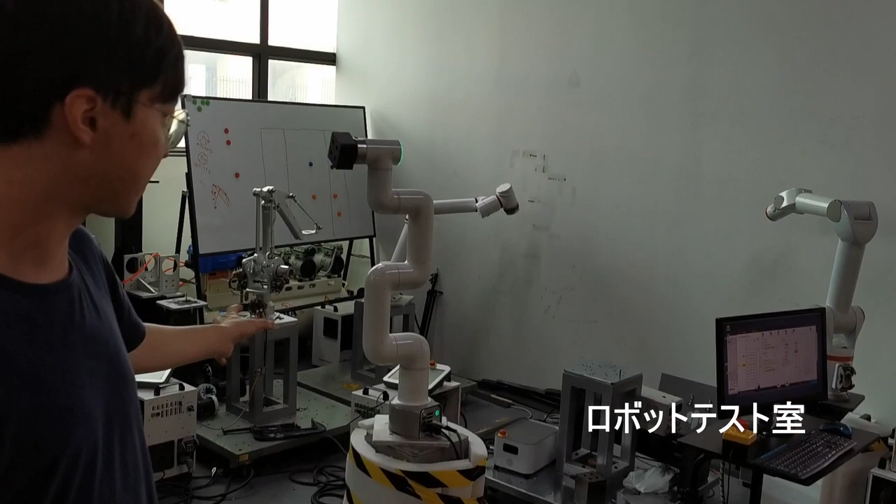This is for testing of the big robots. So we have some testing here, mainly about the testing. This one is the S series, this is the C series.

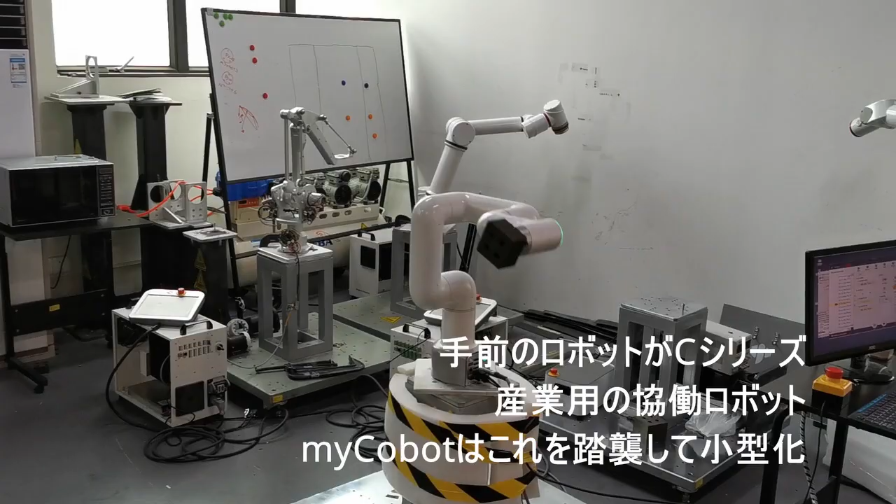So this is the initial design of the myCobot. This is the initial design. Looks very similar.

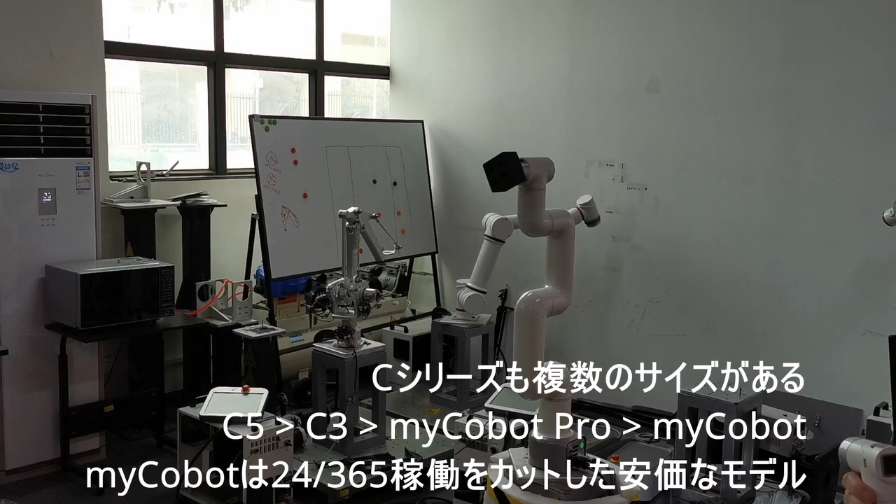The C series is the smallest industrial robot, though there may be many smaller sized robots of this kind in your product line. Yeah, so this is the C5, the payload is 5 kilograms.

We also have the C3, similar but more smaller. They are both for industrial usage. So: C5, C3, myCobot Pro, and myCobot.

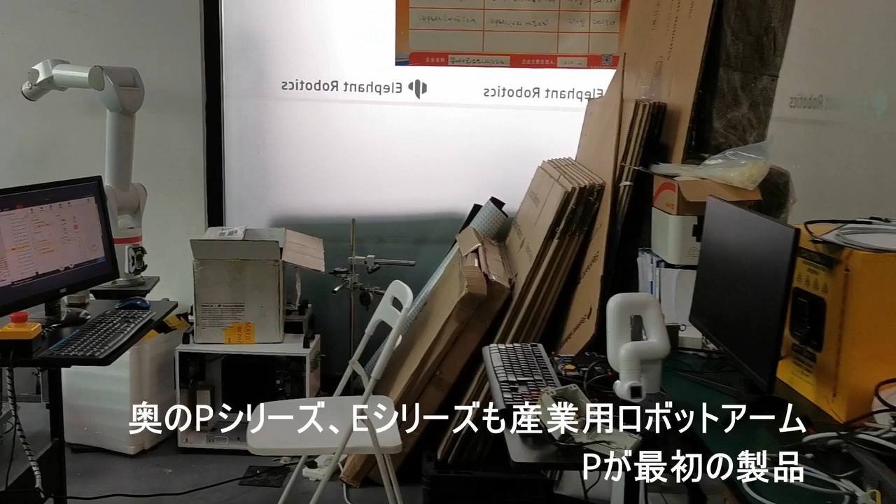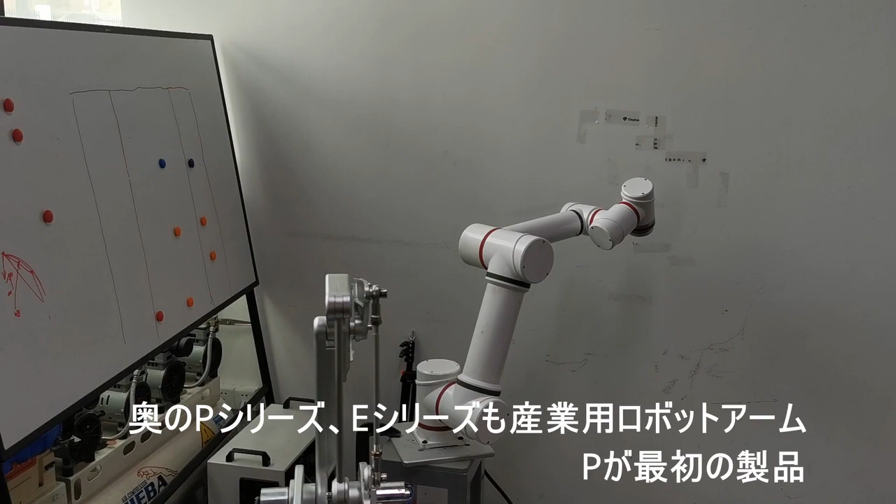Other series as well, this is some previous robots, the E series and the P series. I saw this one in HAX. Yes, so this is the P series, and some other testing robots here.

What's the difference between the P and the E? The price - the E is much cheaper, and the payload is higher, because of the design of the joints. And the C series is more collaborative.

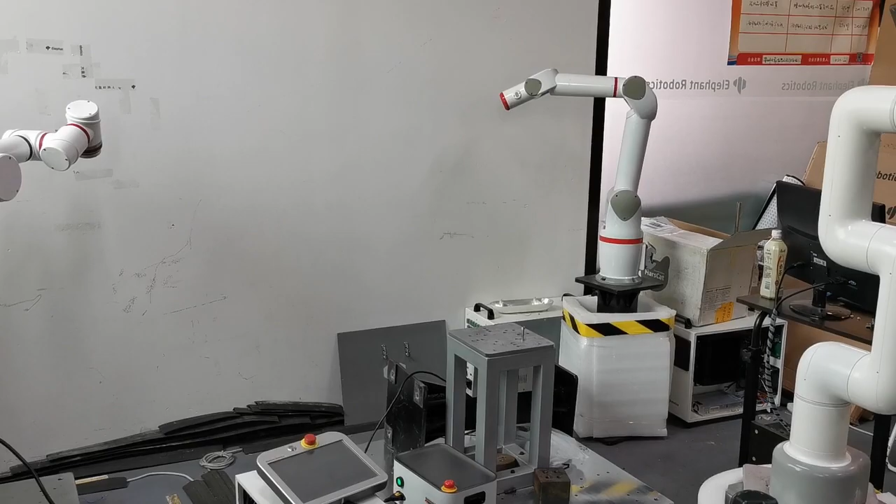So this one is what we are mainly selling right now. This is algorithm testing here. The E series and P series are a bit more simple.

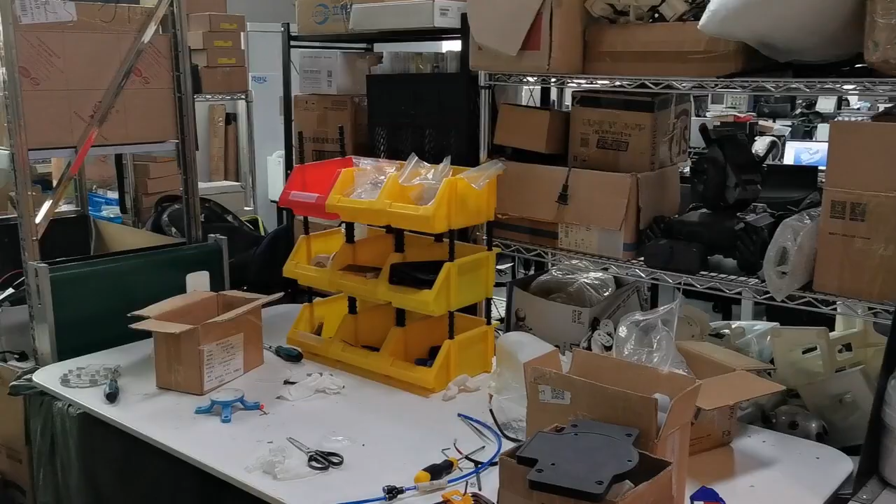Please explain about Elephant Robotics and the myCobot product. Okay, so we are Elephant Robotics. We make different robot arms and other robots. This is myCobot, the smallest 6 degree of freedom robotic arm, and we made it for education purposes. The value of this product is we can help people learn robotics from scratch, learning how to program a 6 degree of freedom robotic arm from 0 to 1.

We also have myCobot Pro and some other robots we will launch this year, and we've already launched some others. So this is the basic background, and right now we have more than 40 engineers. We want to make big progress this year, so let's see what happens.

How long have you been running Elephant Robotics? So I founded Elephant Robotics in 2016. It all started with HAX - we joined the HAX program, the hardware accelerator, that year. One year later we got another fund in 2017, the angel fund.

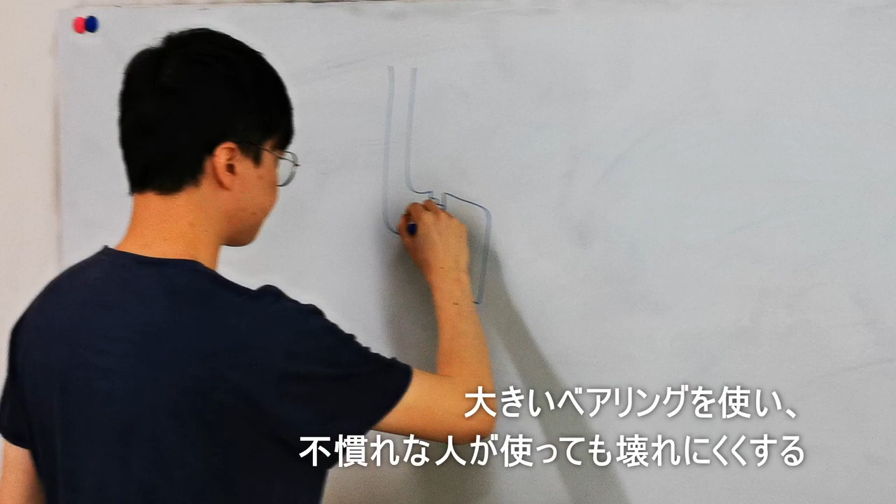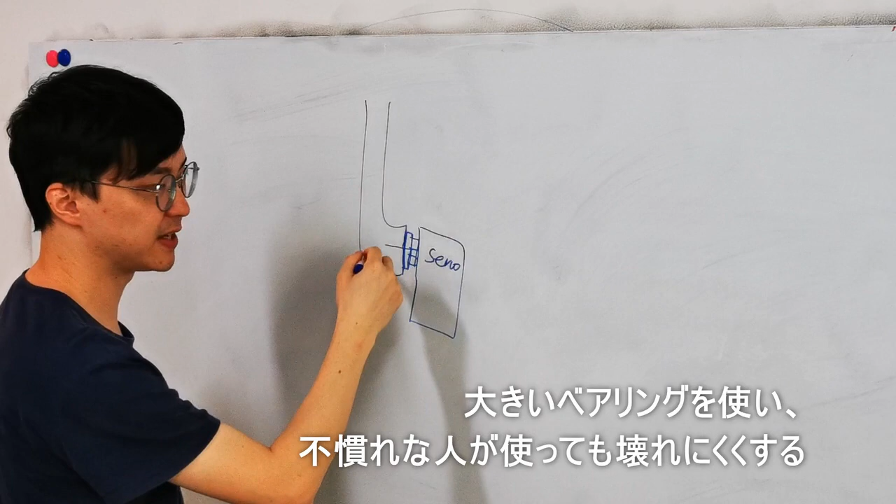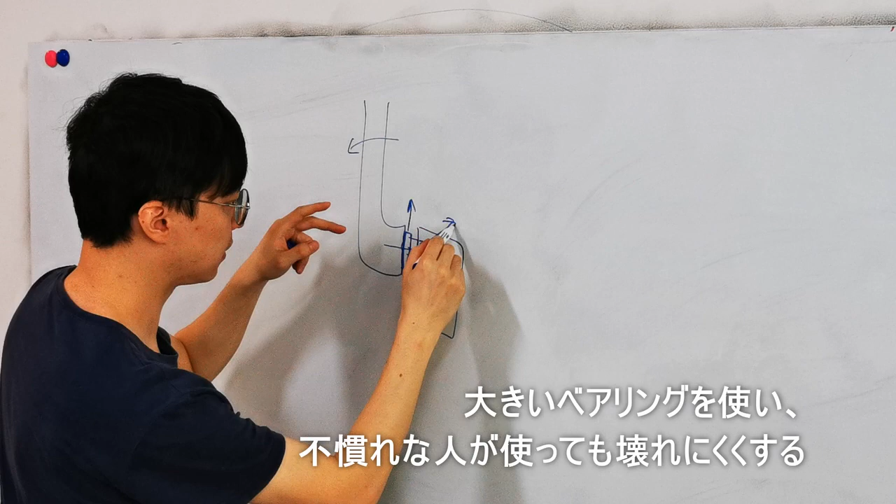So for example, this is the servo, and this is the shaft, the output shaft, directly connected with this link. When we rotate from this side, this may make this part move a little bit, and make the whole thing shift towards here. So this may harm the bearing here, the bearing here may harm this a lot.

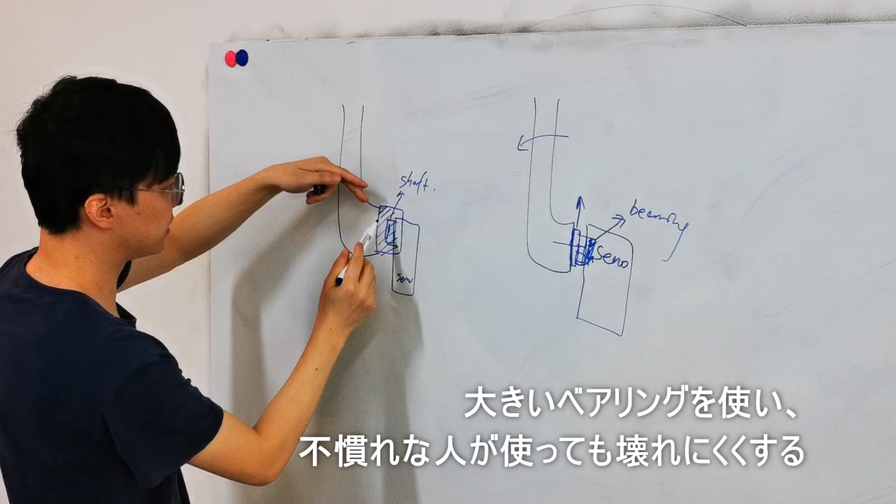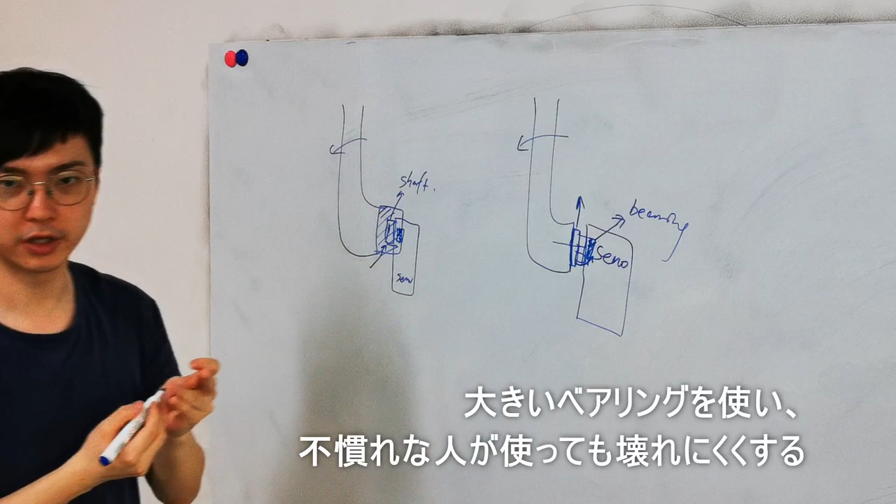So what we make is, we make a hole and servo here, this is the shaft. So we make a whole bearing here, and when you rotate it, all the force will move to the bearing, and the bearing is made by aluminum and some other metal. So this may not harm the small bearing in the servo. So this kind of design is, when you do this kind of force on the robot, you will not harm the servo a lot.

But most existing products use this other method. In Japan there are still not so many people who know about us, because we only sell on our website, and most people if they don't get into our website, they don't know us. So right now, Switch Science has more opportunity to reach the consumers, much more opportunities. We only write in English, and Switch Science, as one of the biggest local retailers, has much more force and power to let more people know about this. So I think this may be one of the quickest ways to let people know this kind of robot and buy it from Switch Science.

How do you think about the market in Japan? The market in Japan, so usually market or customer?

So the market, we have some calculations actually. We compare with many robotic arms in different places. So what we think is, every year in Japan maybe around 1,000 to 2,000 new people may buy the myCobot, and they can buy from our website or from some local retailers like Switch Science. Maybe around 1,000 to 2,000 people to buy this kind of robot, to buy myCobot, and maybe half of them want to buy the M5 version, and we also have the Pi version, so this may divide by two. Yeah, so this is what we calculated before.